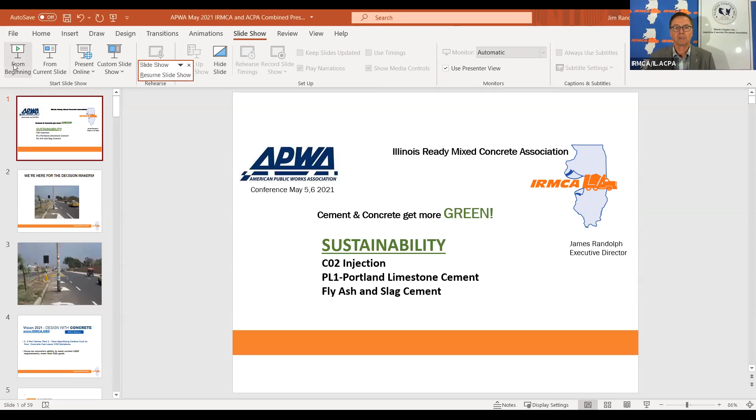I hope you're having a good day, and a good concrete day for you this season. What I'm going to talk to you about is sustainability. That's the buzzword today for concrete. What are we going to do to make concrete more sustainable? Have you ever really given it much thought? There's a lot being done. In fact, our industry is leading the way in sustainability. We're very green. We're going to show you how we can do that through CO2 injection, through PL1, Portland limestone cement, through fly ash, the use of slag cement. This is related to both cement and concrete. We're reducing our carbon footprint in both arenas.

So we're here to talk to you, the decision makers. And often you want to ask somebody, how do you keep from making a bad decision?

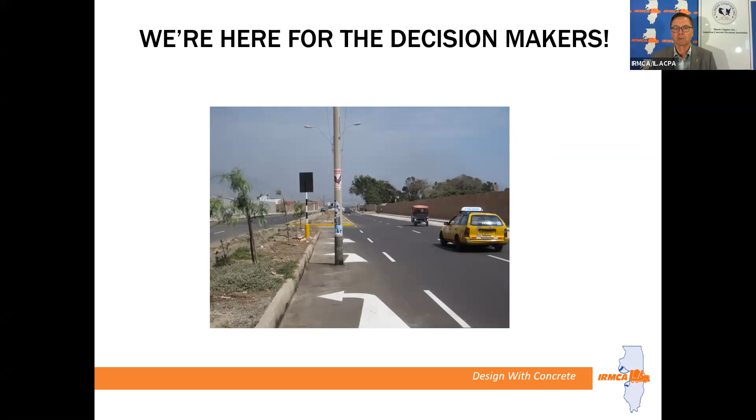Well, I never met an engineer that I had to worry about that, but this is down in Peru, another country, third world country. I'm not sure if the pavement went in first and then the pole later, or if they paved around the pole. But I see a lot of things wrong with this picture. I'm going to zoom in a little bit, and that rooster up on the pole says no cockfighting. That's important, so you have to drive in the left turn lane to read that. A little further to the left, you see a black sign, I guess it's facing the other way. Would that be wrong way traffic? Somebody coming from the other way to turn in towards the pole? I don't know. But obviously, if you don't make a good decision, things have to be done over. In this case, there could be accidents, but I thought it was a very interesting picture to be sure.

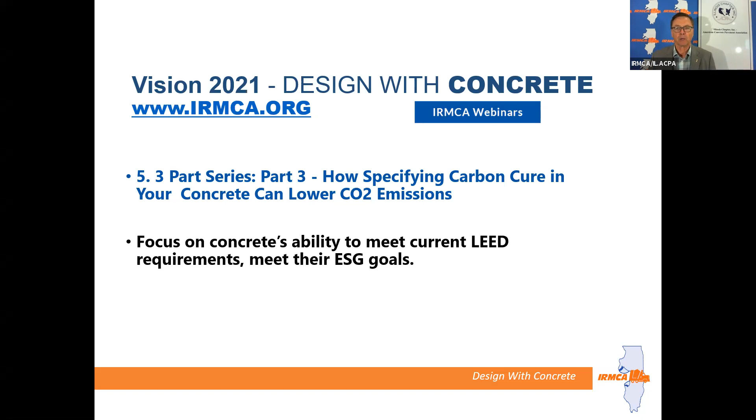You want to specify carbon cure in your concrete because it not only reduces the amount of carbon emitted, it also reduces the amount of Portland cement required in the mix. For every pound of Portland cement we can replace with CO2, there's that much less carbon emissions from the manufacturing cement plant. So it really happens in more ways than one. If you go to that part 3 series, you can get a 45-minute detail on that.

Another way to design your concrete: this has just come out in the last few years, at least to be well known, and that is Portland limestone cement. What is Portland limestone cement? It's made by taking limestone and crushing it to a finer blend than even the cement clinkers are. They can become cementitious when blended in the clinker kiln, creating a cementitious product, again reducing the amount of cement that has to have additional heat to make the final cement product. It's somewhat technical, but it's very easy for me to say that with Portland limestone cement, we're going to reduce our carbon footprint at the cement mill.

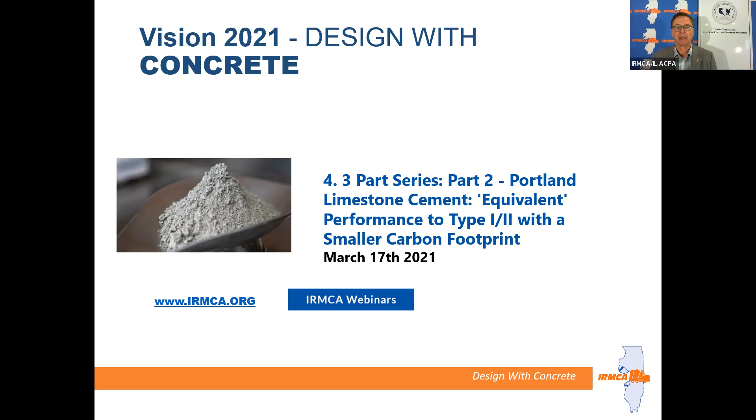And we're getting high performance concrete with that. So if you go to our webinar number 4, part 2 of the 3-part series, you'll see that, and you'll see this title that I'm showing you on the screen.

Let's talk a little bit more broadly about sustainability. We've been for years using fly ash, a byproduct of coal-fired power plants that would otherwise go into a landfill or some other disposal. We can use up to 30% plus of fly ash to replace Portland cement in our concrete. How is that sustainable? Because you're reducing the amount of cement produced and doing away with a waste product. And what's great is it gives us high performance concrete at the same time.

You've heard more and more about slag cement, and I can go into greater detail about how these molecular structures are different and create this high performance. Slag cement is a byproduct of steel mills and their kiln process of heating molten metal, and it can be used as much as 60% replacement in concrete.

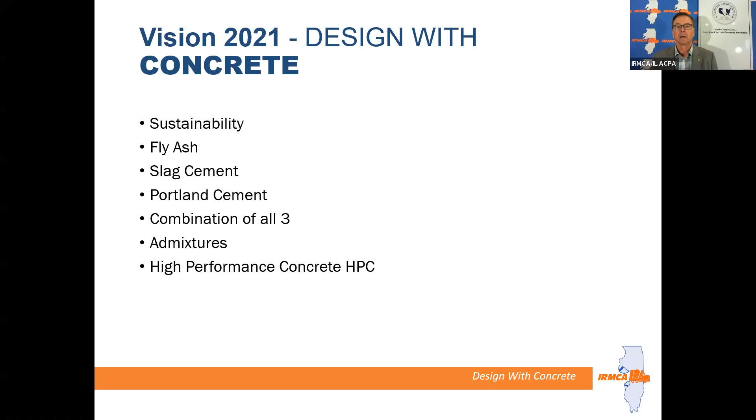So you've got these ingredients of fly ash, slag cement, and Portland cement, and you can use a combination of all three to make a ternary mix that gets you high strength, workability, and durability. We can also use admixtures to reduce the amount of Portland cement required to get the strength and performance you're looking for. All of these methods rely on producers who are highly trained and skilled in making tested, proven recipes for long-lasting, durable concrete, even in the high performance arena.

Now here's a whole other way to use cement: reclaiming roads. The fewer times you have to redo a road, the lower the carbon footprint. This is full depth reclamation with cement using a ready-mix concrete truck, putting out a cement and water slurry.

How do you do that? Well, you use the existing roadway, often a county road with an A3 type pavement, oil and chip, and you roto-till it, breaking it all up in place. Then you come along with your cement slurry over the top of it, run the roto-till over again, and blend them together. Then you take your motor grader, which you all have in your townships, and grade it smooth and level, then come over it with a roller compactor. It will set, harden, and be durable and long lasting—you won't have to oil and chip it for years to come.

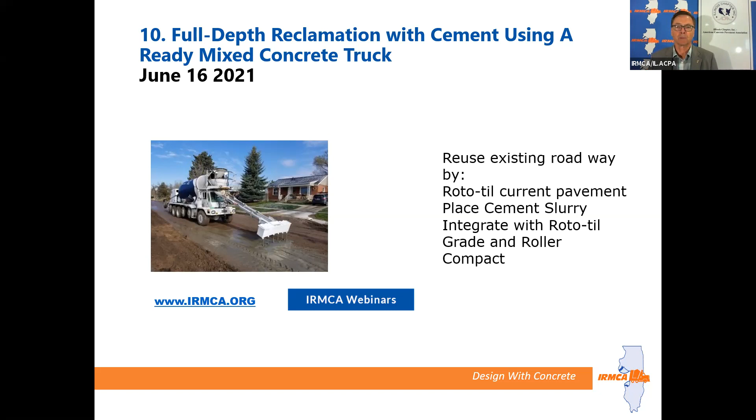Another way we're sustainable is by reducing the amount of concrete you need. Now that doesn't sound right—we want to sell as much concrete as we can, but we want to be sustainable as well. So we do this by placing concrete over existing pavement. In most cases, we bond the concrete to the pavement, creating a composite pavement.

What you're seeing in this picture is Imperial Bondware, a factory that makes cups and plates for McDonald's, KFC, Dairy Queen, and so on. On this lane down to the warehouse, they have 13 trucks a day come in with 80,000 pound loads, go to the warehouse, offload, reload new product, and come out with 80,000 pounds. So this road gets beaten by 26 loads of 80,000 pound 18-wheelers on a daily basis—a lot of heavy traffic.

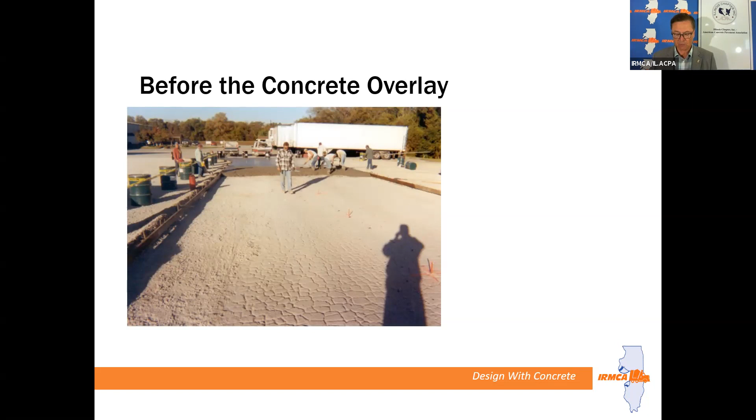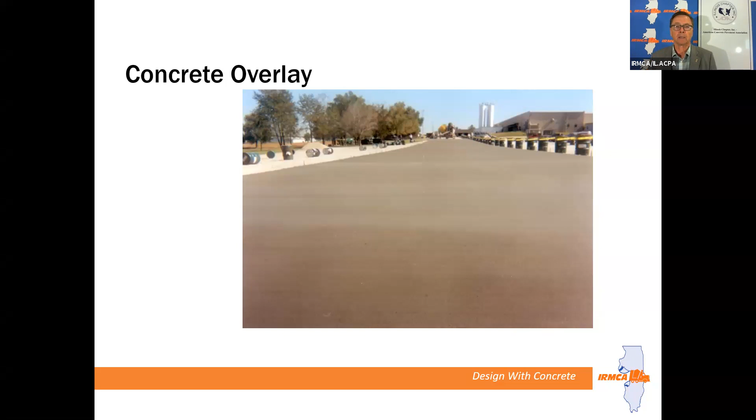They're going to do the same thing at their other facilities because it's lowered their maintenance costs. So instead of putting in 8 or 10 inches of concrete, we're only putting in 5 inches on an existing pavement—we didn't take the existing pavement out. So how is that sustainable? We're saving diesel emissions by not removing the old, and we're saving concrete cubic yards by putting down a thinner amount because we've made a composite pavement. So you can certainly work this and intertwine it into your LEED and other environmental incentives.

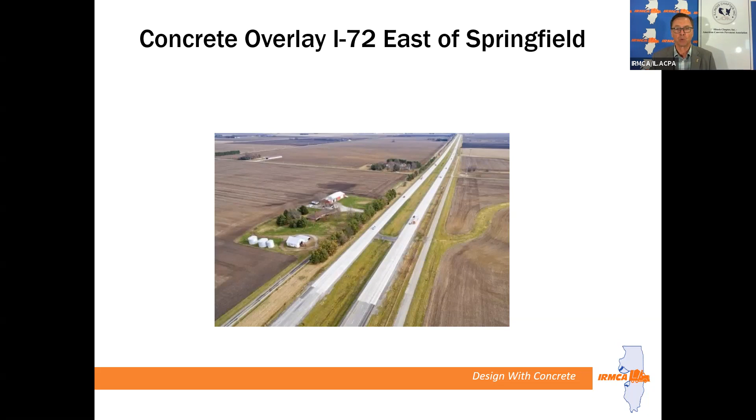So here's an interstate just outside of Springfield. I think it's at least 10 years old now—high performance concrete overlay on existing asphalt. We hope to see more and more of our interstates go with concrete overlay. It's one and done, probably last 25 years, designed for 25, probably last 40. We'll see, but we need more of these. And now with the push on sustainability, it makes even more sense to go with the concrete overlay.

Our county roads throughout Illinois are now putting concrete overlays on their existing asphalt, getting high performance. Our villages, 80,000 pound roads, they're putting a 5-inch overlay on their existing roads. So this goes faster, takes less money, and the initial cost is very competitive.

Here's Mike Ayers. Thank you, Jim. All right, we're going to talk about concrete overlays as a sustainable solution for your existing needs.

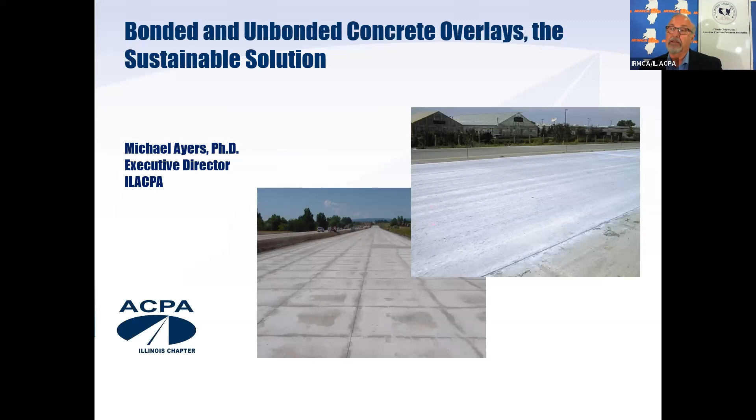But before we get into that, we're going to talk a little bit about sustainability concepts, about pavement preservation techniques, the things that might work for you in your particular circumstance.

So the first thing we look at is a pavement management system. Do you have a cohesive management system in place? What kind of data do you collect? And from that, how do you analyze it and make informed decisions about what's the best avenue for your money?

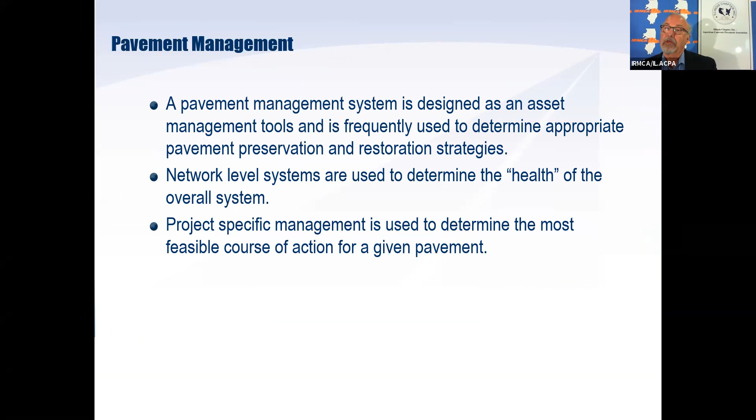So the first term we look at is pavement preservation. It's a network level long-term strategy. It's not project specific. It's simply a way to look at your system and over the course of the next 10, 20 years, determine what is the best bang for the buck.

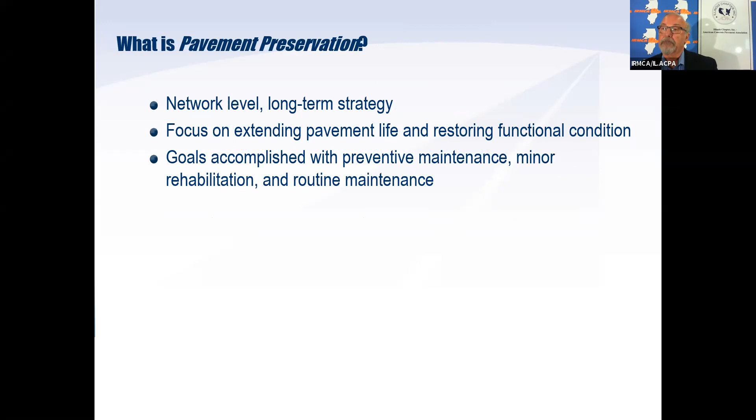So we have a lot of different preservation techniques that we readily utilize, but they all have some commonalities. They're cost effective. They're applied to structurally sound pavements. They maintain or improve the functional condition and does not necessarily increase the structural capacity.

Structural capacity of a pavement is the ability to carry the imposed loads without premature failure. Functional condition is when the road may be able to carry the imposed load structurally, but for some reason it's not serviceable to the public—it could be rough, it could lack friction, it could be noisy. There's a number of different things we look at in terms of what is a functionally good pavement versus a structurally good pavement.

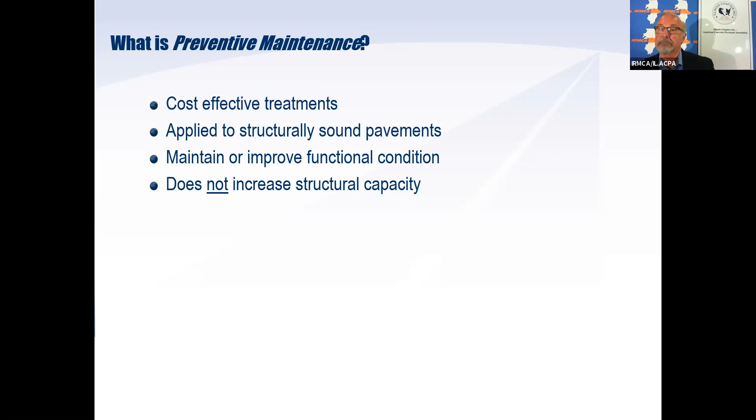So concrete pavement rehabilitation, the way we've typically looked at things, has 3 steps. We do pavement restoration on a limited basis, followed by resurfacing when the specific restoration techniques are no longer economically viable. Finally, if overlays are not working because we have drainage issues or underlying issues with materials, we may look at reconstruction.

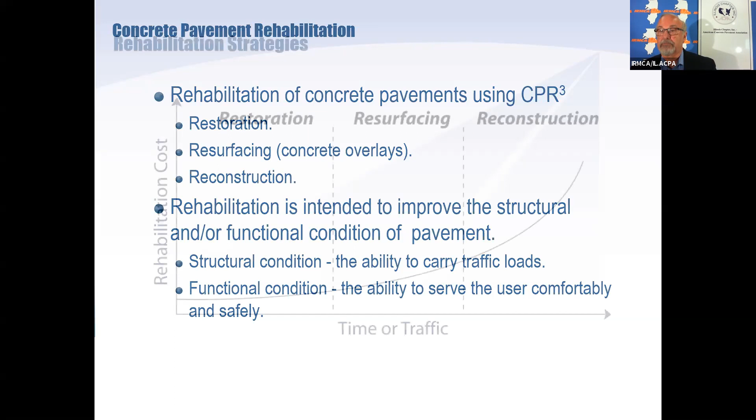Rehabilitation is intended to improve the structural or functional capacity of the pavement. So by definition it's going to be more expensive to do concrete overlays or reconstruction than it is to do selective restoration. These are the three categories we look at in terms of what we could do with an existing concrete pavement—rehabilitation costs versus time or traffic.

Over time, every pavement deteriorates. Even if there were no loads on the pavement, it would still deteriorate due to material degradation. That's applicable for concrete, composite pavements, and asphalt pavements. But in terms of concrete pavements, we have a very slow rise in that curve—in other words, we don't have to do a lot in order to keep the pavement in serviceable condition.

If you look back historically, the interstate highway system back in the 1950s, 1960s, they were designed for 20 years. Some of those pavements are still in service. A lot of those pavements that are in service could carry 10, 15, even 20 times the design level of traffic.

So we have moved out of the pavement cycle where we have to go out and do repetitive maintenance or repetitive repairs every other year or every third year. We actually have very long intervals in restoration.

Federal Highway Administration a couple of years ago really was pushing heavily on preventive maintenance strategies. And that essentially said, I'm going to go out when I see any distress on my pavement, I'm going to spend the money to fix it now rather than let it deteriorate into a worse condition. $1 today, it's often said, will cost you $5 tomorrow if you wait in terms of pavement repairs and restoration.

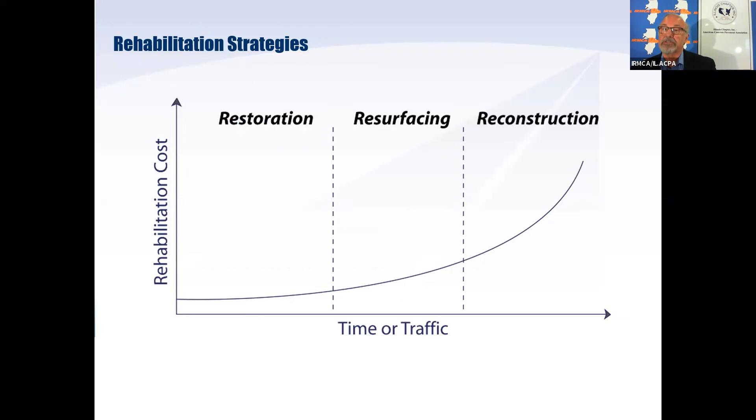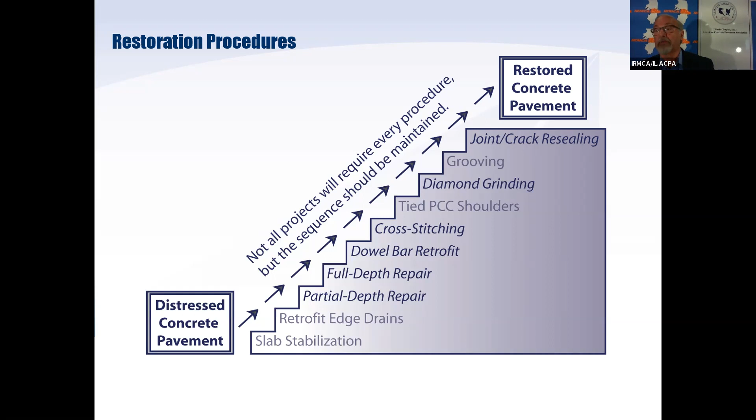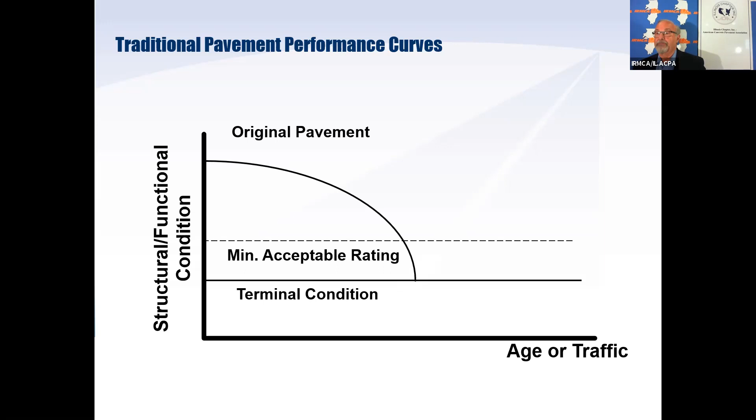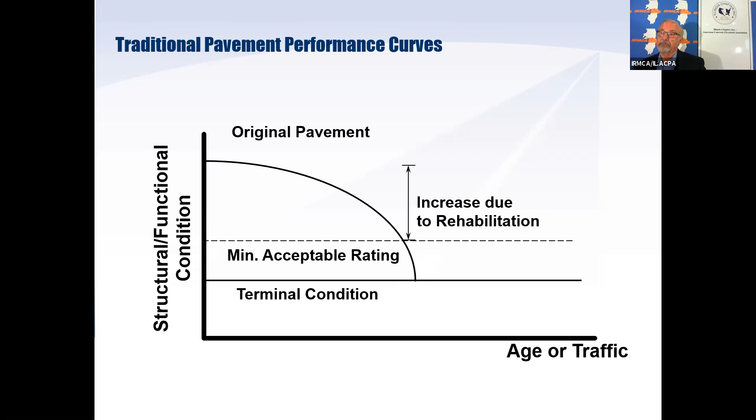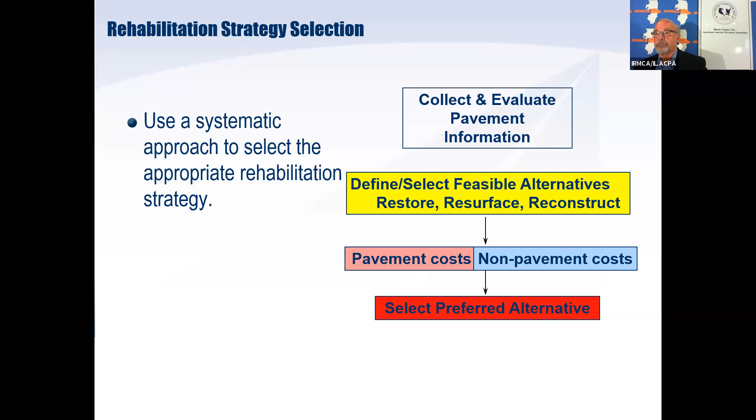Rehabilitation strategy is not a terribly complex operation, but it can be an expensive operation. So we want to look at the information available: historical records, performance history, and the overall cost to own that structure. Then we select the preferred alternative based on many different factors, because we can do partial depth, slab stabilization, full depth repairs—there's a whole range of things we can do.

Now we're going to get to overlays. This is the step that we follow past pavement restoration. When pavement restoration reaches a certain threshold value that you'll have to establish for yourself, it becomes cheaper to actually do a universal fix, which is a concrete overlay.

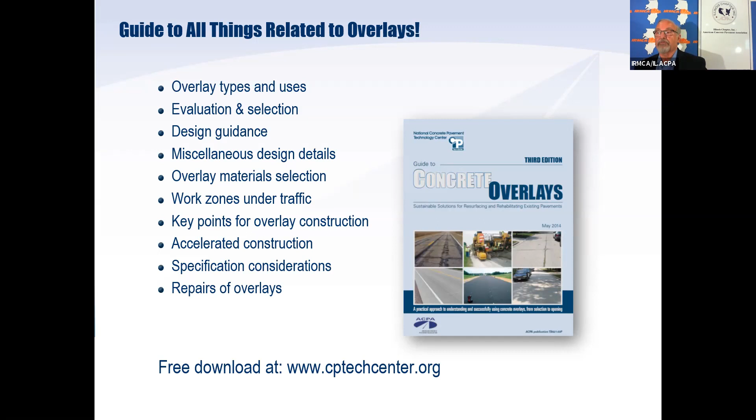What can we use overlays for? We can use it on intersections in urban areas, secondary roads, urban freeways and interstates, urban arterials, primary interstate highways. There's no end to the things we can do. We overlay major airports, runways, taxiways, aprons. We've done overlays on huge industrial facilities. So in addition to these relatively smaller scale projects, we do some very large scale overlays.

So the benefit of concrete overlays essentially boils down to a couple of things. It's going to save you money over time as opposed to an asphalt overlay. Concrete overlays, if properly designed and constructed, can easily last 20, 25 or more years. The routine maintenance and restoration activities during that period are very much minimal—they're easy to maintain, they're easy to fix.

One of the things in urban areas that we frequently deal with is utility repairs. Let's say we have an existing asphalt pavement with buried utilities, and we put a concrete overlay on top of that. It's not difficult to saw and remove selected panels in order to service those utilities. We can reestablish support under the pavement using low-strength flowable materials, or restore support using compacted granular material, and simply replace the surface after we're done with the utility repairs.

It shouldn't be a detrimental point with concrete overlays that they're difficult to fix in urban areas, because they aren't.

One of the things we looked at in the past is improving surface reflectance, so the amount of light necessary to illuminate an urban area is significantly reduced. We actually have studies showing you can use far less energy to give the same amount of light into a parking area or city streets. This is a real cost savings in terms of dollars, but it's also very sustainable if you want to look at it from the environmental aspects.

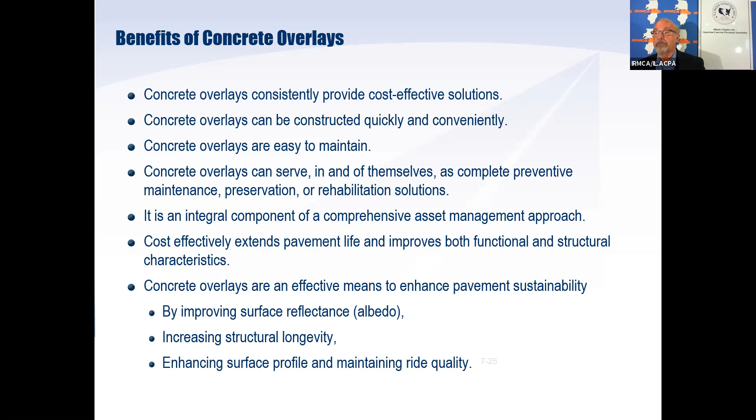On the acpa.org website, there's something called the National Concrete Overlay Explorer, and it tracks a portion of the overlays that have been constructed in the US. You can sort them by overlay type, by thickness, by the functional classification of the roadway, and various other aspects. It's a very powerful tool if you'd like to go online to see what comparable pavement sections have done around the US.

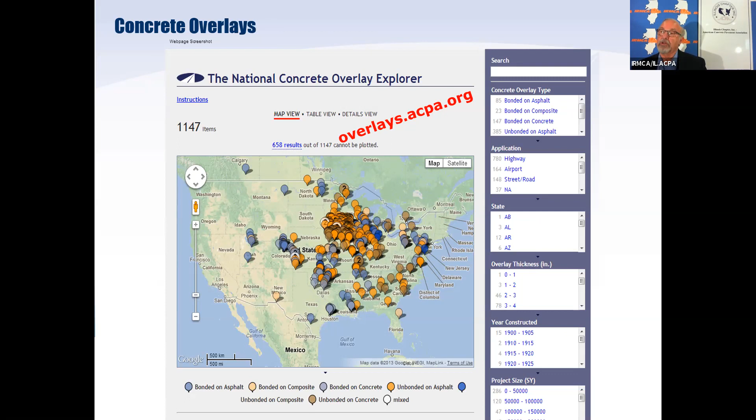When this overlay explorer was put together, we didn't necessarily differentiate between good and poorly performing overlays. So if there's a particular design that was not overly successful, it'll still be in this guide, book, or explorer, however you'd like to term it. So this is a good source of information if you want to look up projects to see whether you might want to construct something like that.

Illinois has lots of concrete overlays—we have hundreds. The vast majority of those are county roads and urban, and we have some major interstate projects like Jim had mentioned on I-72 around Springfield. Those are long-lasting, high-quality, high-service pavements. Over the course of time, you can go back and do a comparison between other pavements in your network compared to the concrete overlay to see which is the most inexpensive to own.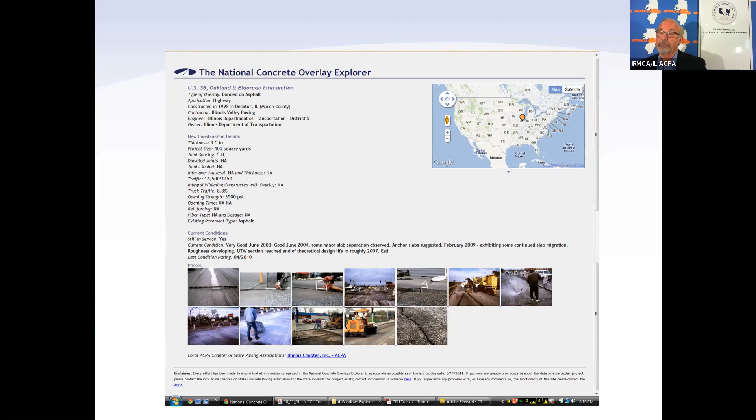There are two general classifications of overlays: bonded overlays and unbonded. With the bonded overlay option, over asphalt, we probably do more of those than anything else in the state of Illinois in terms of concrete overlays. They are cost effective, minimal maintenance, and very easy to construct.

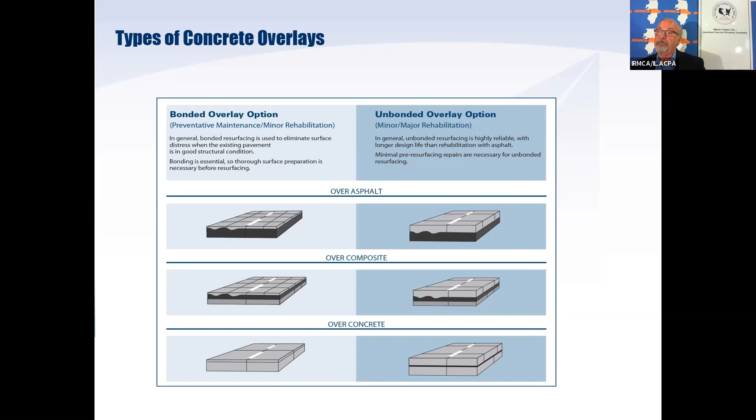On the right-hand side, you'll see a concrete overlay over an existing asphalt pavement, but it seems to be much thicker. That is because it is. The overlay on the left, we have built those anywhere from 2 inches to 5 inches. On the right-hand side, when it's unbonded, we are essentially constructing a new concrete pavement on an existing asphalt base. That pavement may be 9, 10, even 11 inches thick, whereas the one on the left hand is probably more in the order of 4 inches, even for fairly heavily trafficked roadways.

For instance, with preventive maintenance, we're talking about the need for full depth repairs. So you have a transverse crack that's opening up in the pavement and you want to repair that to keep moisture out, to keep incompressibles out. You could do a specific full depth repair relatively inexpensively. But what happens if every 5th slab exhibits that kind of behavior?

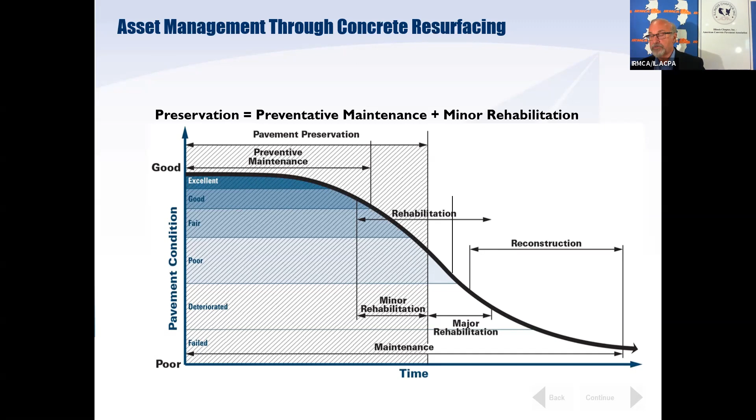So the overall goals of project selection are that we're trying to pick the overlay that best suits a specific condition. If you have a pavement that's in very poor condition, the most likely type of overlay you're going to build is an unbonded overlay. If it's in reasonably good condition or somewhat marginal condition, then a bonded overlay may be appropriate.

There's ways that we can do the design of these pavements and do a cost comparison to determine which is the most cost-effective means to get a certain level of service. Do I want this overlay to last for 10 years? Do I want it to last 25 years? I just came back from doing a job where we are looking at how to buy 3 years in the life of this pavement, because the budget to completely reconstruct the pavement kicks in year 4.

So what are we going to do that buys us 3 years? Well, we're certainly not going to put a heavy overlay down, but we may in fact put a very light concrete overlay that will, for all intents and purposes, give us the 3 years. And yes, we have design programs that will calculate that out.

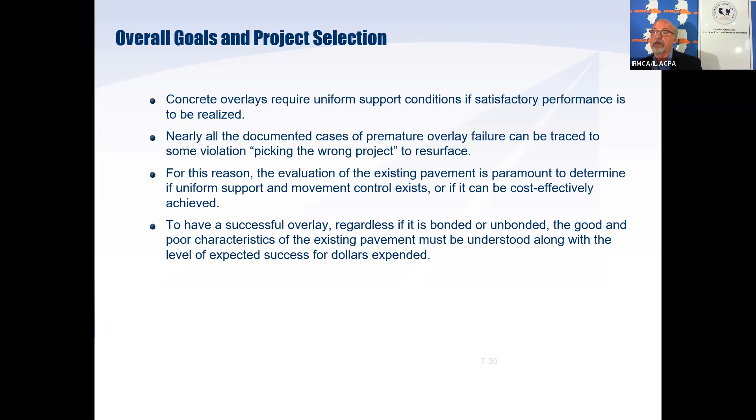So the condition of the existing pavement is obviously important. If it's in good condition, bonded overlays are a fitting solution. If it's in very poor condition, very likely you're going to be building an unbonded overlay with a separation layer. Keep in mind that if you're putting a concrete overlay on a concrete pavement, whatever distresses exist in the existing concrete will likely reflect through to the surface. The same is not true for putting a concrete overlay on an existing asphalt pavement.

We may have to fix areas of structural failure in the asphalt, but we don't have to do much surface preparation. The asphalt modulus is so much lower than the concrete that if you have cracks in the asphalt, or minor alligator cracking or other types of distresses, they won't propagate through the concrete.

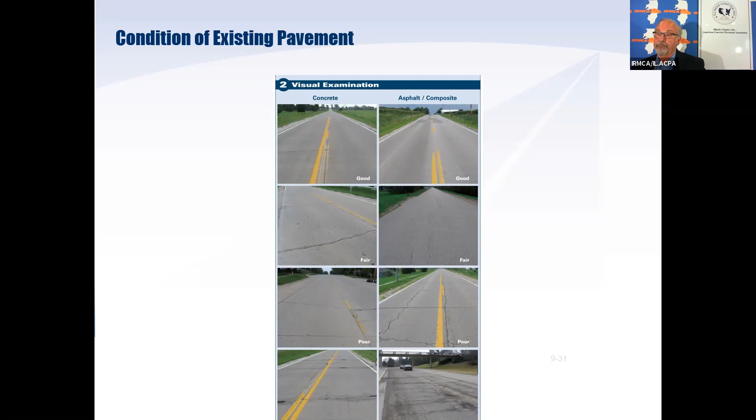So we might want to do some selective coring and laboratory testing, depending on the importance of the project. We're almost always going to want to pull a few cores. We want to look at the level of distress in the pavement through a visual survey, but we also need, in terms of calculating the required thickness, to know what we're dealing with. So we can do selective coring.

On the upper right-hand corner is the dynamic cone penetrometer, which is a very useful tool in terms of trying to characterize subbase and subgrade materials. We can do exotic testing. The lower right hand shows a falling weight deflectometer. You can get a wealth of information from that device in a short amount of time.

And if you have an important project, it's worth hiring the FWD crews to come out and actually thump the pavement. We can use those numbers to back calculate support conditions, and basically calculate all of the required parameters necessary to design the overlay.

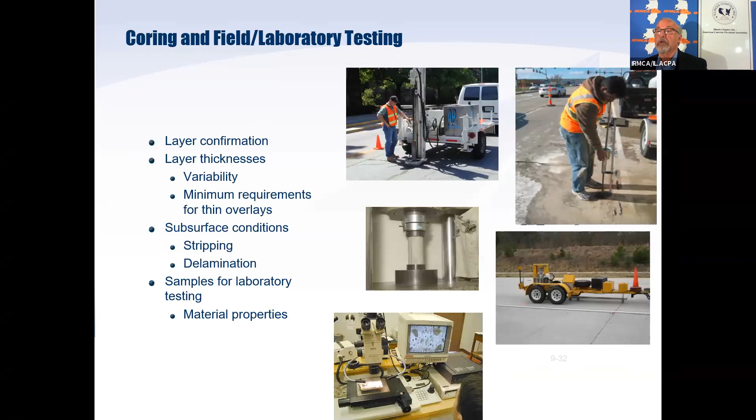So a bonded concrete overlay of existing asphalt or composite pavement. We have built 2-inch thick concrete overlays on existing asphalt. I frankly would not tend to do that. There's a number of reasons for that. If you have very light traffic and you're simply trying to increase reflectance, trying to give a good non-skid surface, trying to get a surface that doesn't require a lot of resurfacing every few years, then 2 inches may be appropriate. But if you have any substantial truck traffic at all, 2 inches is likely not going to be sufficient in terms of structural capacity.

As I mentioned, we do a lot of 4-inch overlays, and we do 4 inches on existing asphalt pavements in moderate to poor condition with minimal preparation required. And we can get 25 years out of some of these overlays. We have had overlays in place for that period that are showing very little in terms of distress.

Now, there are obviously a number of tricks of the trade that have to be employed in designing these. Joint spacing is very different. We typically use fibers in the concrete. We probably are going to mill the surface in order to get a good bond between the concrete and the asphalt, because remember, if we don't bond to the existing asphalt pavement, that thin concrete overlay is going to fail under truck traffic.

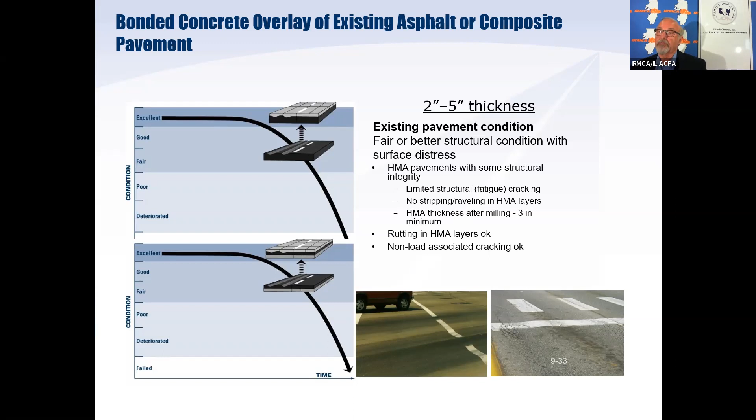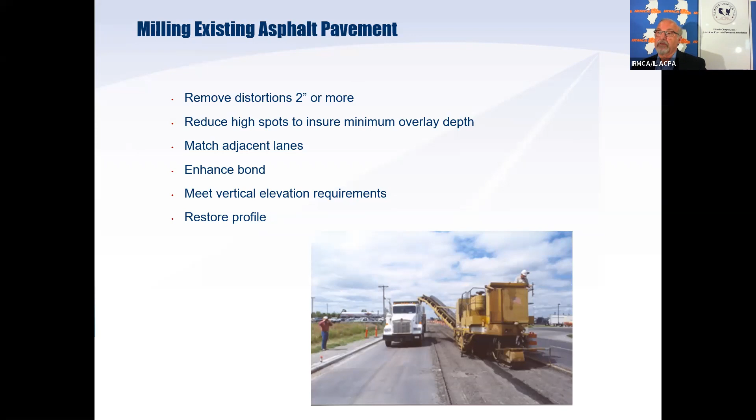So do we absolutely have to mill the asphalt? No, we do not, but it's to your advantage to do that. Milling is relatively inexpensive. You can use the millings, recycle those, dress the shoulder with them. But it allows us to put down a more or less uniform thickness of concrete, which is important. It allows us to match existing lanes. But the most important thing is it enhances the bond, and the bond being all important.

So one thing to remember, and this is something that has come up several times in the last 6 months: if I mill my pavement, I'm expecting to do a bonded overlay. Well, I need to have somewhere between 3 and 5 inches of remaining asphalt after I mill the pavement. What you see in that photo is the milling operations went clear down to the subbase, which means I do not have adequate asphalt to bond to. Well, if I can't bond to the asphalt in order to transmit some of the load, then my overlay is not feasible.

I'm going to have to go back to the drawing board. So if this is one small area, the rest of the pavement I've cored out and I figure I'm okay, but this one area was very thin. I can come out and take a backhoe and dig out that specific area, and I can put in asphalt and roll it out. I can put in flowable fill. I can also put in concrete, a lower quality concrete, and strike it off with the surface. And then when I put my overlay, I have uniform thickness and a more or less uniform level of support.

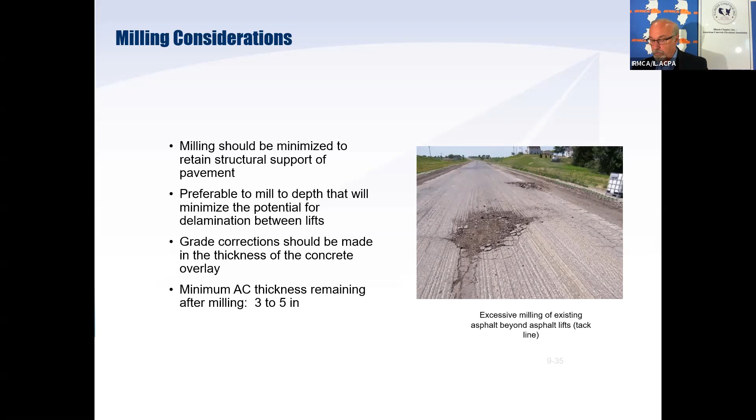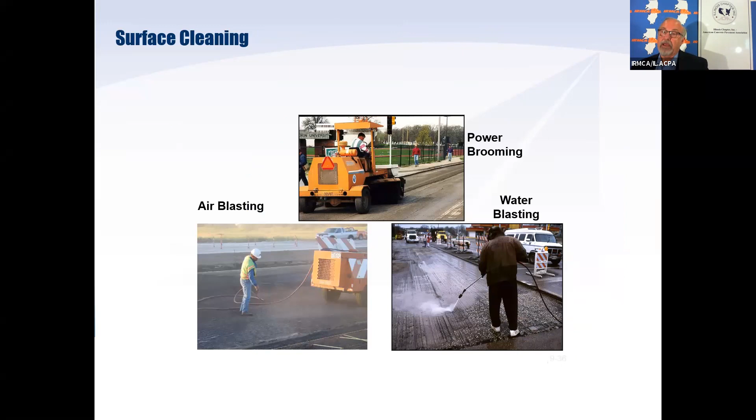So in order to get the bond that I desire and need, I'm going to clean the surface. I'm going to power broom it almost always, and then I'm going to air blast it or water blast it depending on the circumstances.

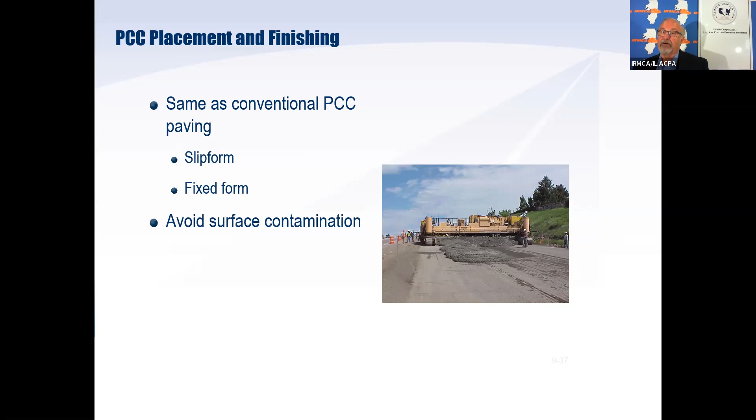I can place it with a slip form paver. If it's in an urban area, I can form pave it. I can put it down with a vibrating screed. If I wanted to, I could put a short area down, striking it off with nothing more than an edge tool or a strike off tool.

Joint sawing, absolutely critical, as is curing. You have a very large surface area and a very small volume of concrete, and it tends to give up moisture very quickly. Therefore, it's going to crack unless you can get the curing compound on it soon after placement. If you cannot put the curing compound on for some reason, you can spray it with an evaporation retarder that will buy you a little bit of time before you actually put the pigment and curing compound on.

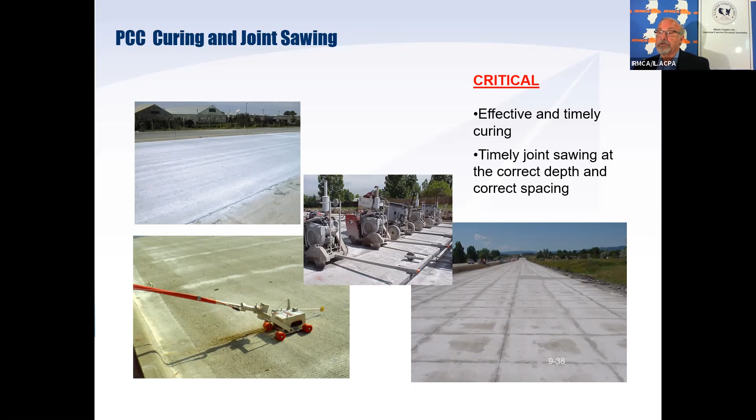We have to saw it quickly. We have to use early entry saws, and we have to have sufficient saws on site to accomplish it before the pavement cracks. What I'm getting at is your window of opportunity for sawing is much less than the conventional pavement.

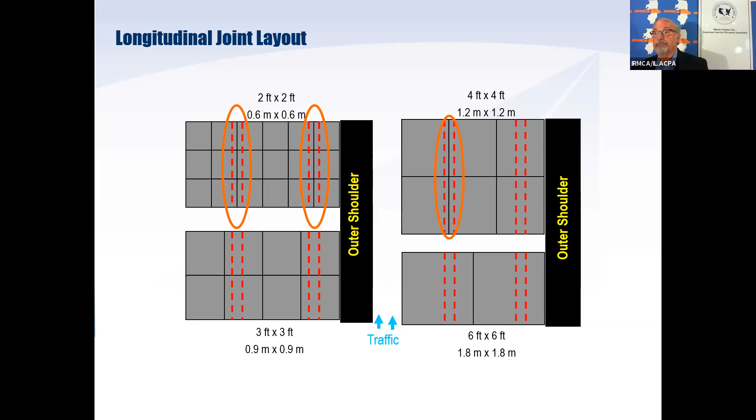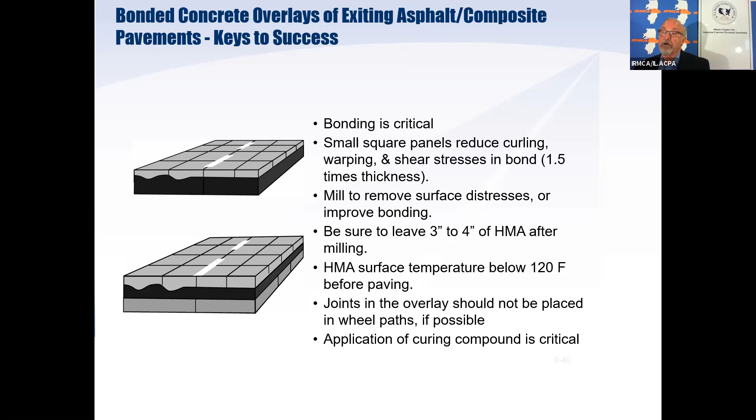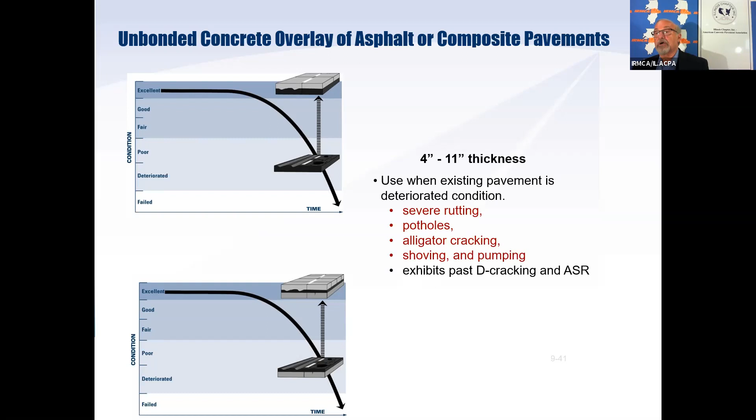We have unbonded concrete on asphalt or composite. And again, these are just constructing a new pavement on an existing pavement. The existing pavement doesn't have to be in even minimal condition to make this work, because you are assuming that the existing pavement is nothing more than a base course. So it is appropriate for severe rutting, potholes, alligator cracking, shoving and pumping, D-cracking and ASR if it's a composite pavement. You can do this, and you should do this, when the existing pavement is not something that you can bond to and add structural capacity to your overlay.

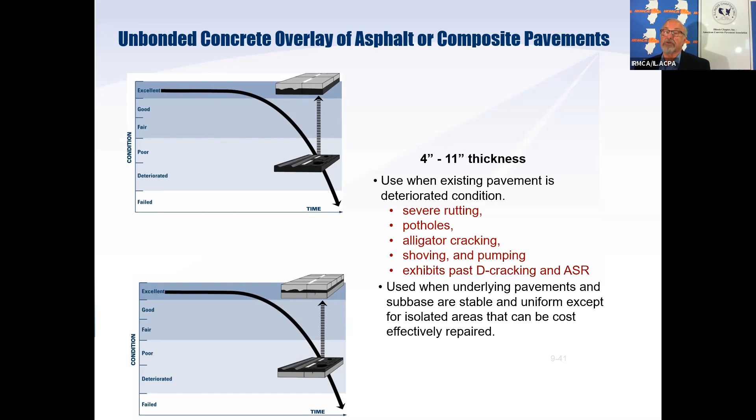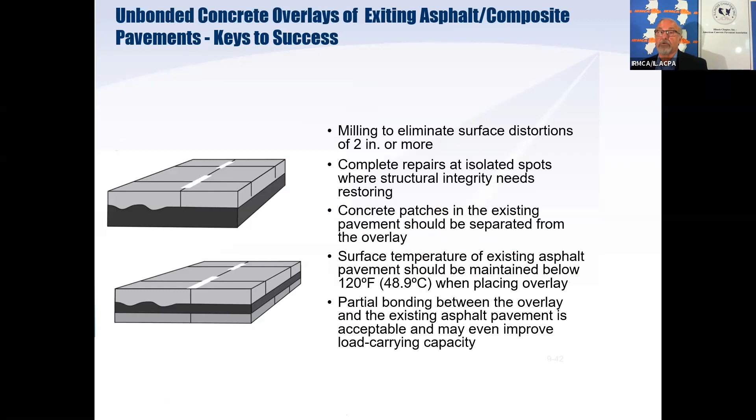And again, a lot of the same criteria applies, the 120 degrees. Partial bonding in this case is actually okay. It helps you, it doesn't hinder you.

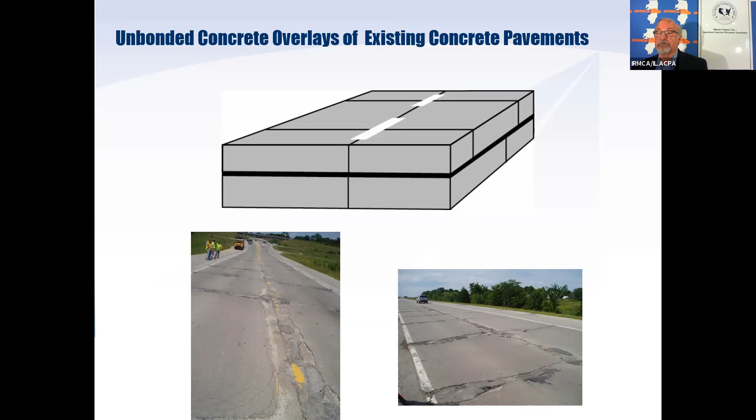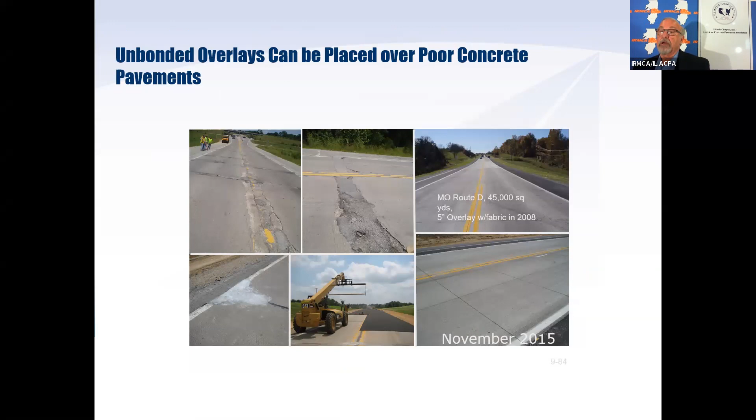The last overlay we're going to talk about, briefly, is this unbonded concrete on concrete. You can put this on a really severely distressed pavement like you see on the lower right. And the key is that you're going to separate the old pavement and the new pavement. You can do that by either putting down a thin layer of asphalt, generally less than 2 inches, or a specifically designed geofabric, as you see in the bottom right photo.

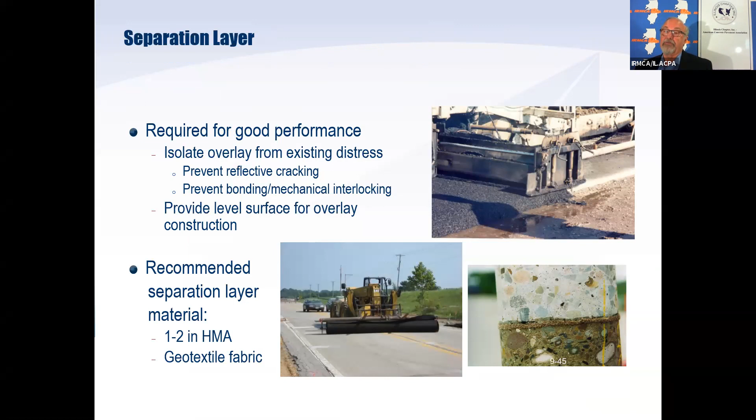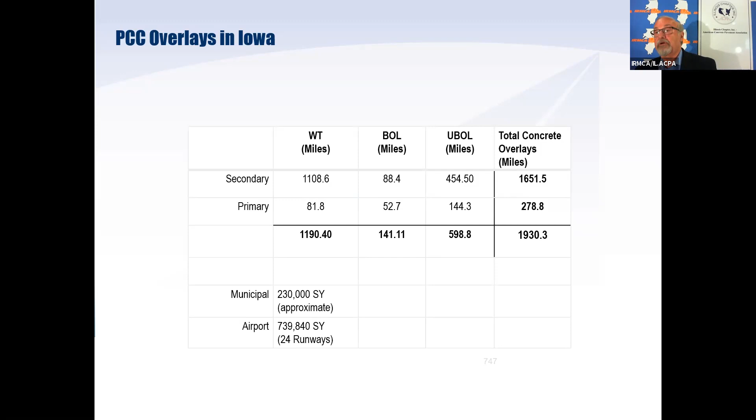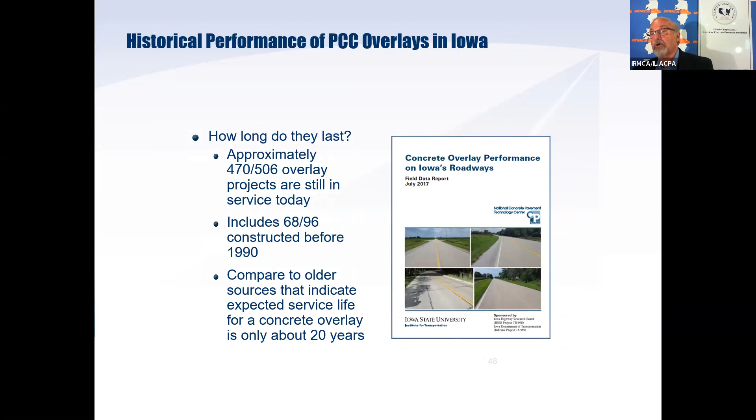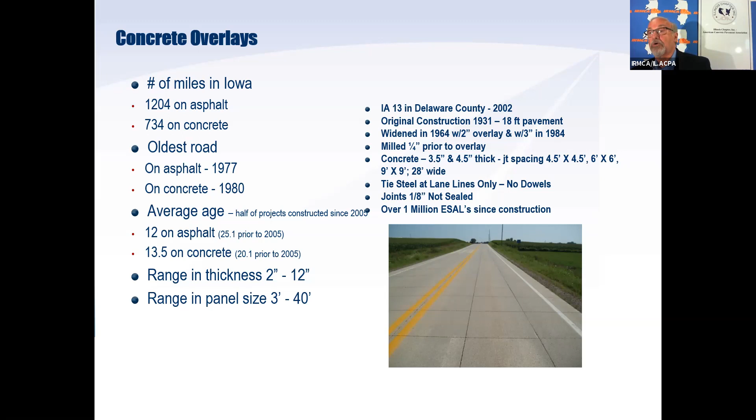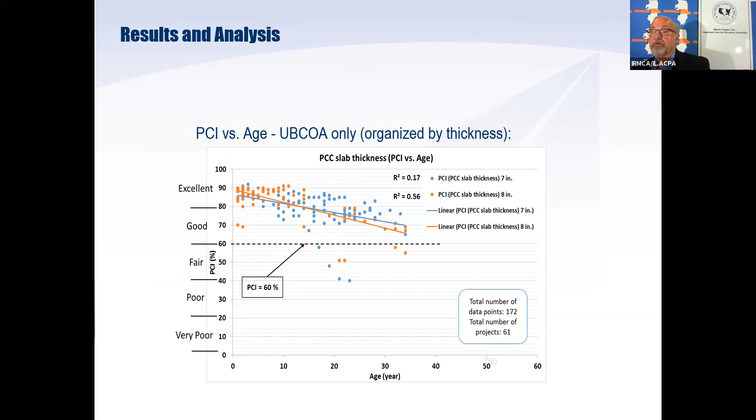And they have, for the most part, performed extremely well. So the oldest in Iowa is 1977 on asphalt. On concrete was 1980, 2 inches to 12 inches, and panel sizes from 3 feet to 40 feet. We've used that in great measure to do the overlay guidebook that I referenced before. So this is the results in the analysis. I know that is somewhat difficult to read, but the bottom line is the vast majority of the overlays, regardless of age in Iowa, regardless of the thickness and the type of overlay, are still good performing. So there's the case history publication that you can download from the CP Tech Center as well, and it's worth looking at.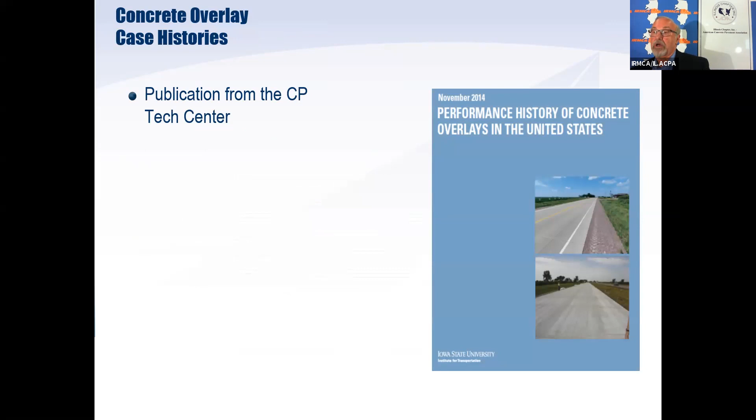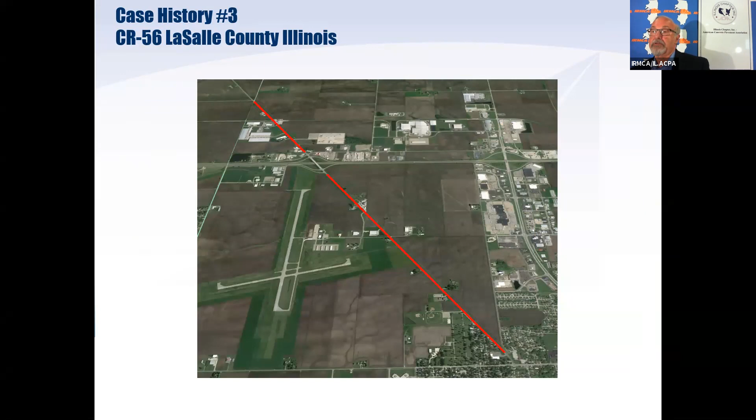And here's one from Illinois. County Road 56, LaSalle County. You can see the alignment. 5 to 7 inches thick. It's 40 years old. It's carried, now this is a few years old data, carried somewhere in the neighborhood of 8.4 million equivalent single axle loads. It's unbonded on asphalt.

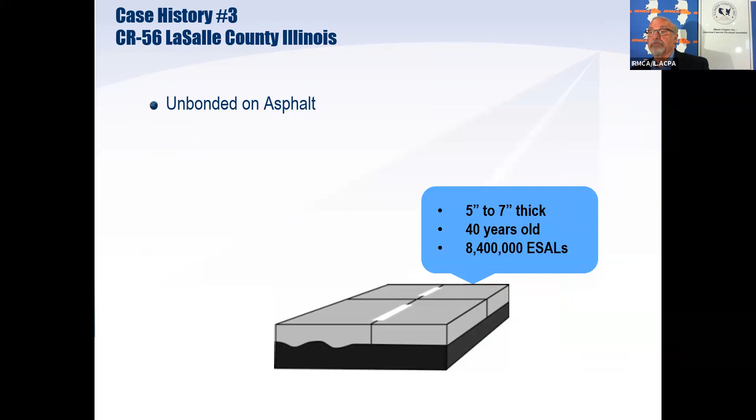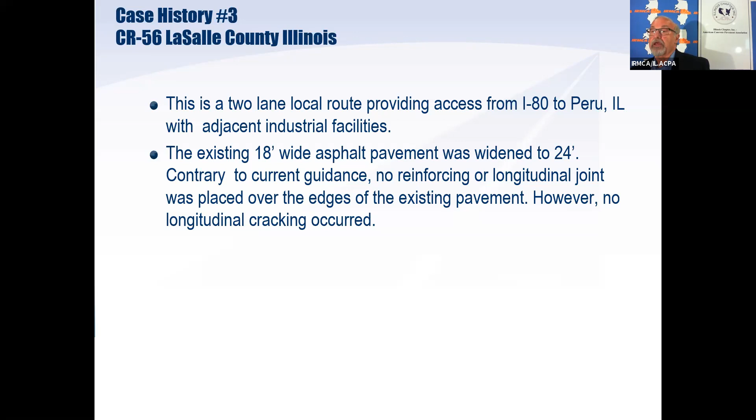Common sense would tell you, based on what I've said before, that you need a thicker overlay. But this overlay has performed extremely well. The existing 18-foot wide asphalt was redesigned and widened out to 24 feet. There were no reinforcing bars. There was no extraordinary measures taken. The overlay was simply placed and extended out past the existing asphalt. And there's the section.

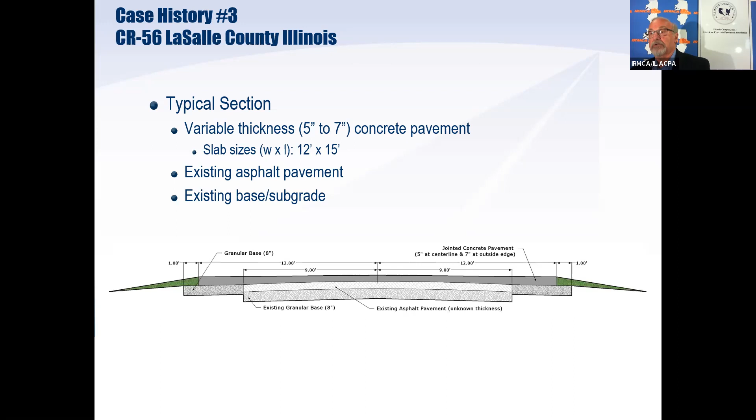And 5 to 7 inches of concrete is borderline on load carrying capacity in terms of heavy trucks. So we design only for trucks. We don't design for cars. So there is the integral widening.

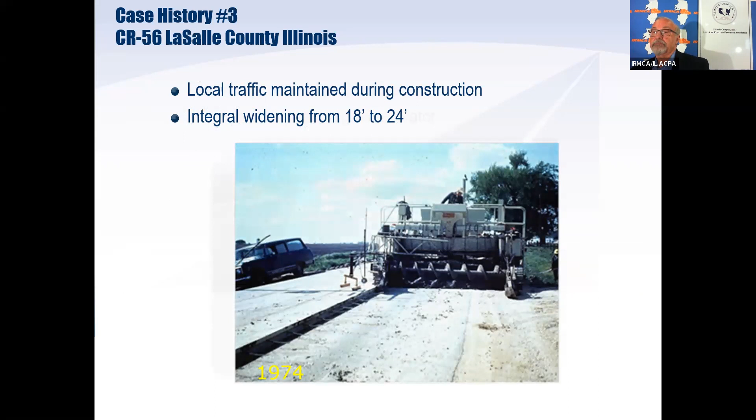There's the final product: diamond ground, one of those early restoration procedures we talked about, after 28 years. Minor patching where you had a lot of heavy trucks turning and coming out of the elevator.

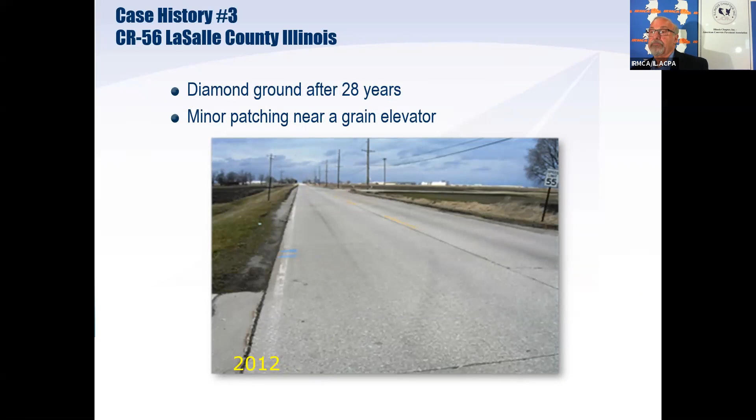The last question you might have is regarding staging. How difficult is it to build this? Can I build this under traffic? The answer is yes. We have a lot of case histories documenting the how-tos in order to stage effectively.

In an urban area where we routinely do this, we have an asphalt intersection that's prone to failure from shoving and rutting. We can take possession of that intersection, shut down the intersecting roadways on Friday night after traffic passes, prep it, place the concrete, and open it to traffic prior to Monday morning's opening.

So yes, we can do it. We can do it in an urban area. We can also do it in rural areas. Highway 18 in Iowa was a perfect example: a 2-lane rural road constructed under traffic with zero accidents and a very quick turnaround on opening.

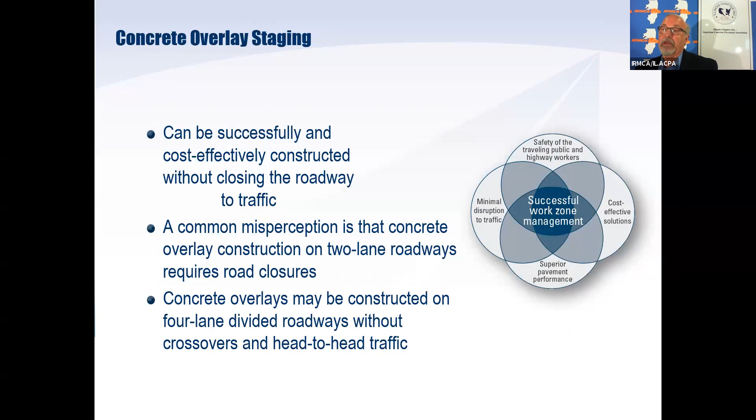So there is a wealth of information out there. We do overlay talks routinely within the state via webinar, and when we get back to some level of normalcy, we'll be glad to come out and talk to you about these techniques, preservation, economy of scale, and various other aspects of sustainable solutions for concrete.